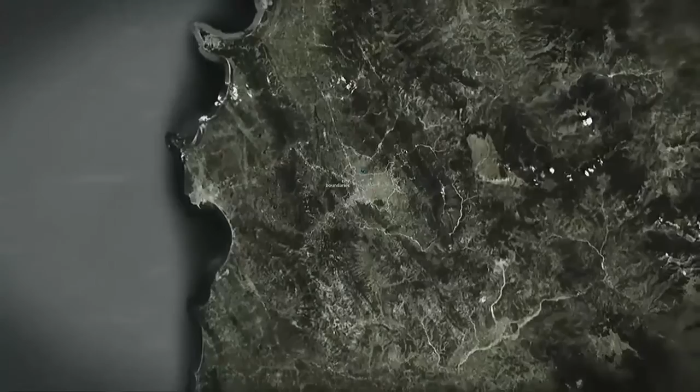So this is where Tirana is, somewhere down south, a little bit east of Italy, and it's a very incredible city. I guess I may spoil a little bit of what's going to come next.

So I'm not going to say too much about this, but it's kind of a flat piece of land surrounded by hills and mountains and ragged mountains.

And when we won this competition in 2012, the project was the key opportunity for the city to establish a new way of growing and re-establishing itself as a properly planned modern city.

And the 3 things that you see up there, the mosque, the hammam, and the bakery, which were the heart of a kind of Ottoman settlement that founded Tirana, are really no longer there.

The mosque is in part still there, but everything else has been wiped through the tumultuous history of Tirana, of communist and fascist rule and all this kind of stuff, which has left a very important mark.

But we were asking ourselves the question, so what are we going to do? We don't have a political agenda. We are designers. We want to deliver interesting places to live in a city.

And so we were given a site. At the time, the municipality was about 10 kilometers square worth of boundaries, and we were given a site of about 4 kilometers square to come up with a strategy.

And the most striking thing was that there was a straight line crossing the city, this boulevard that Stefano was mentioning, kind of started by the Italians, progressed by the communist regime, and then abandoned. And so we took that, and that was the core of the competition.

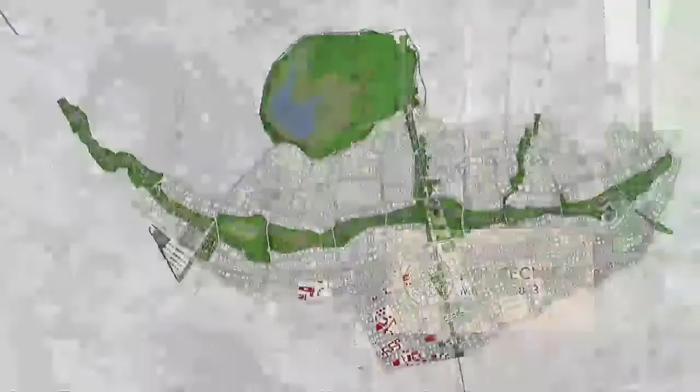So we had to do something with this boulevard, and we developed it in a very linear fashion, which was very different from every other entry.

And then we emphasized, a lot more than other people, this 8 kilometer stretch of river, which starts at the entrance of the city and ends at the exit of the city. Obviously the river is much longer, but in this transition, the river changes from a mountain river that comes down from gorges and stones, really wild, to a flatland river.

So we took that as an opportunity. And I guess the way we're going to talk about it today is that architects took this as an opportunity to define a future, right? So we established visions, and engineers actually have to deal with it on the ground.

And so our methodology was, what can an engineer learn from an architect with a big long-term future, and what we architects can learn from an engineer to establish an urban program.

And this is what's coming next. I'm not going to spoil it, but the idea that the city was restructured started when the project that I won, and now is changing again. So it will be another challenge for whoever is involved next.

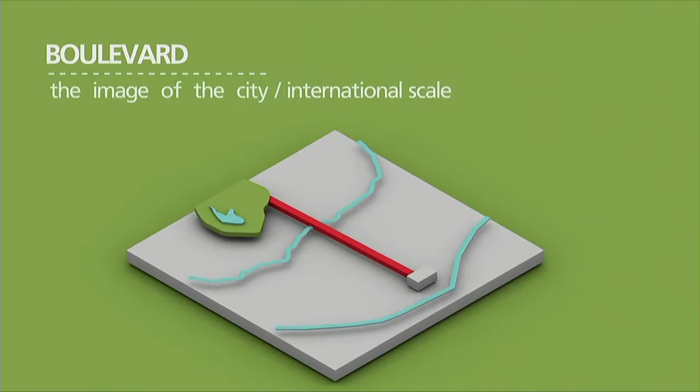We called our approach a constraint-driven approach, which is the synthesis of what I was saying. So we went to the ground, learned the things that we couldn't change in terms of physical things and also political things and social things, and we tried to bring this global idea of big architects who do stuff all around the world, and then sit in Tirana with the locals and understand what it meant for them. And the bits that met, we used to establish our project and our philosophy.

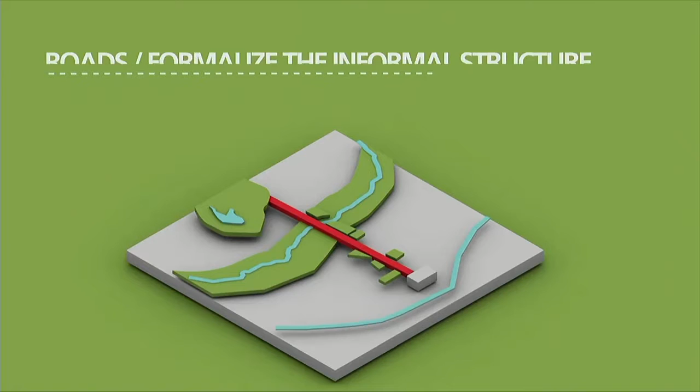There was a lack of, the boulevard was very important. We picked that, very straight, very formal, it's a symbol of a continuation of their history, of the history of the city. Urban space and green space was missing in the city, so we established that.

Pedestrian people in Tirana are out all the time. They walk around all the time. It's a very dense, very bubbly city, even in the not so quiet areas. There are very distinct areas, like happy bubbly, and some are dog-chasing-you bubbly, which is an interesting kind of contrast. And so Alberto, in Italian, will tell you what we learned from the river.

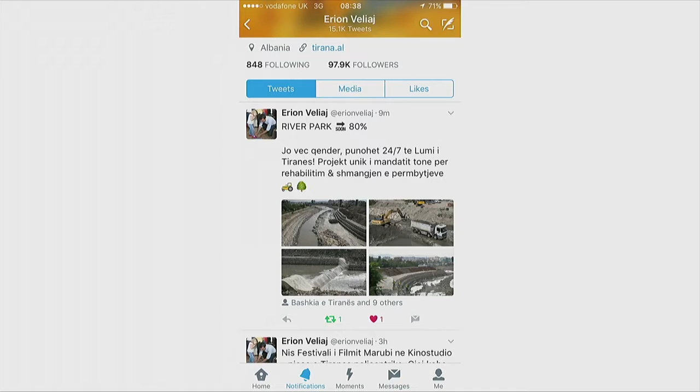But the interesting thing for us is to take our specific technical skills, you know, I make intensity numbers and foundation zones and flood zones, Alberto does that, but the way we try is to talk about them in the thinking of the city, of this part of the city. So what does it mean for people? What does it mean for the urban space? And we found that a very interesting approach.

And the very interesting thing that happens is that we started this job with the previous mayor. Politics in Albania are equally challenging as in most places in the world these days, but they're very ping-pong. So if you have a client on one side, then you can't work with the client on the other side when he comes up. And we were very lucky to have been on the ground, and I think the approach we used, very focused on being on the ground, allowed us to work very positively with the previous mayor as well as the new mayor who's now in charge of this, buying into our project and using it as a showcase of trying to change.

So change is coming. This project outlasts mayors by tenfold because this project is going to take 20 years to become what us architects, and that's what I'm going to show you next, want it to become, right?

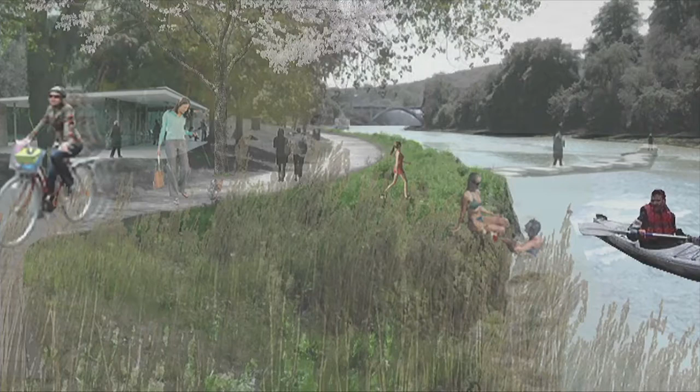A kind of a long cultural... these should all be green, by the way, just squint and think it's green. You know, we do very sketchy renders and we think, oh, it's a natural environment where the fringe of nature coming from the mountains comes into the city, and we will solve this problem of the fact that the banks of the river are built with rubbish.

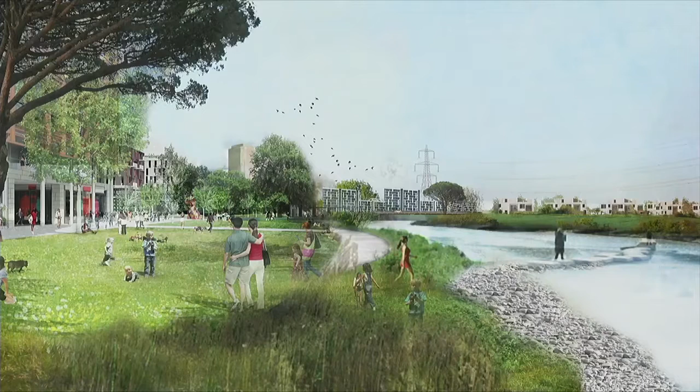We will solve the problem of the informal, read illegal, housing all along the banks of the river. We will solve the issue that there is no bridges, no road that gets to the river. We will solve all this, and eventually we'll end up with a beautiful piece of natural environment that people can kayak in and find pebbles to cross, and it will be a great asset for new development and all this kind of stuff, which is what urbanists and architects tend to do. You know, we just put a picture in the future and then work really hard to get there.

And so this is an extract. Of course, we work with landscape designers that are not here today, but I obviously must credit them. So Turkington Martin, very nice, pragmatic landscape people that deal with flood zones very well. And together we came up with this idea that, yes, the boulevard is the settling of the city, but the river has to be the idea of this new future way of understanding Tirana.

Also, this river is called Tirana. And if you go to Tirana even now and ask them why this city is called like this, they have no idea. They have no idea what the river is, actually, which is a bit strange.

And so we created a program understanding, so the borders of this are in essence the flood zones that we learned by all the data that came out of Alberto's job, and that defined a space where the city couldn't be built as a physical asset. So we leveraged that and turned it into building the city as a cultural green space.

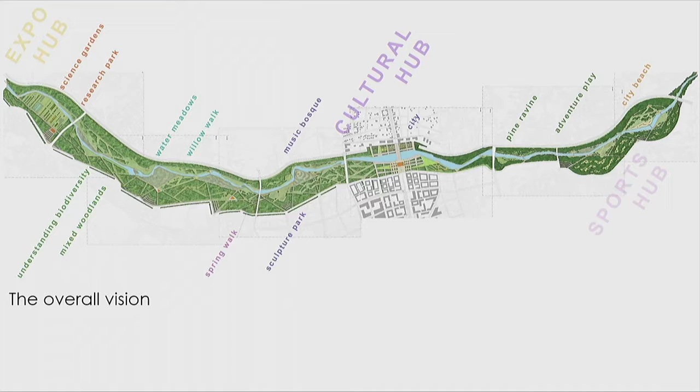And then we designed it in a way that it can be implemented in whichever order and in whichever opportunity, because obviously, if money is difficult in Italy, you can only imagine how difficult it is to get money in Albania, and this thing costs a lot of money.

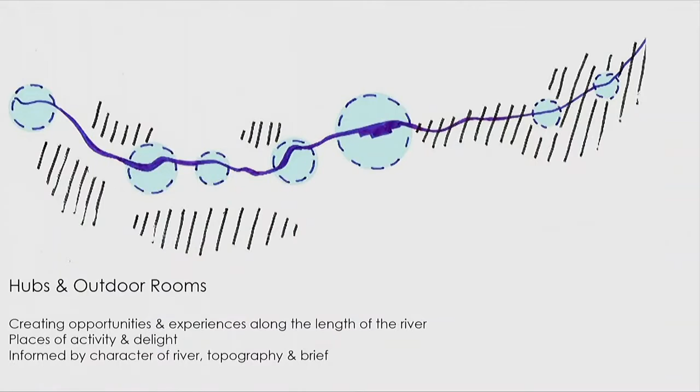So we created a canvas with a designed opportunity for things to happen in whichever way they will find the way to happen. And so we created this idea of hubs and outdoor rooms, which are the zones where the river tends to flood more, because that's where you can't put buildings for real. So there's this kind of double layer of everything. Certain types of trees that deal well with being in water a long time, and types of reeds that prevent the water flow, merge tactically with the engineering of the river management.

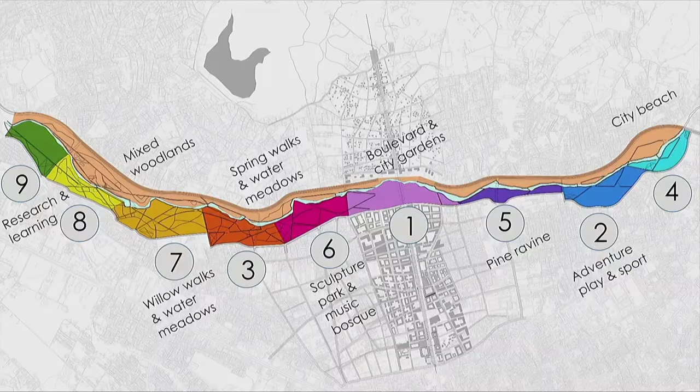And that's how we defined our landscape program and our cultural program within it. And landscape architects always do pretty drawings, so I'm going to show you some pretty drawings. And we worked on sections, and the sections were very important because Tirana is pretty flat, but past the river, there's a hill. So the first elevation of the city happens across the river.

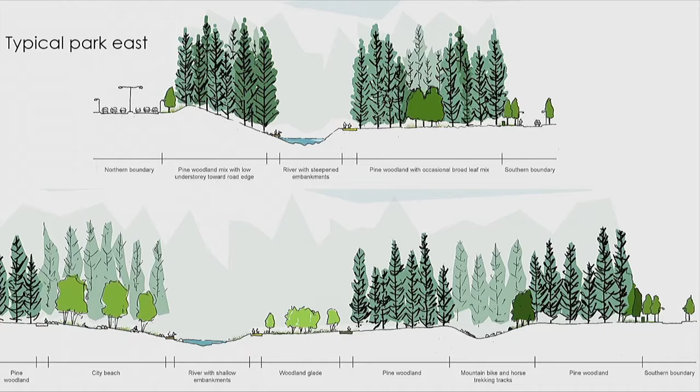So we were really keen to understand how we could integrate a big road and get people to access the river at different points, to ensure that this idea of parks and accessibility from the city, in a vertical connection, was possible, as well as walking along the river, which is obviously a lot easier.

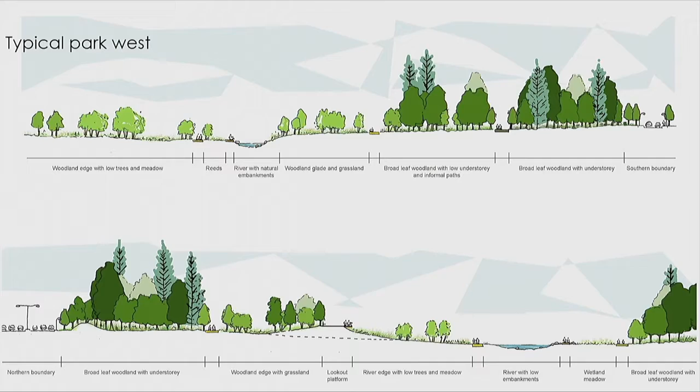And this kind of layering, and all these lines exist all along the river. They just move in relationship to each other. And the elevation—walking in the river is the place that floods. Walking by the river is the place that floods 1 in 100 years, so you can use it as a corridor for cycling and proper eco-commuting. And walking in the woodland is the place that never floods, so you can put cars in it.

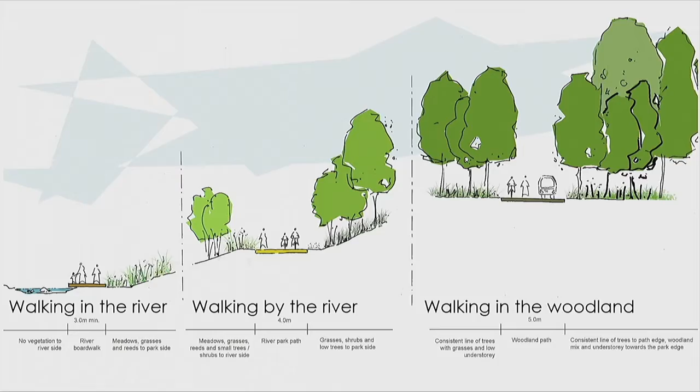And we kind of ended up with this—in summary, a high-density urbanity as a pivot, where the boulevard, the city, grows in density and height, and this really wild, or as wild as possible, nature, because in our view, that's what represents the ethos of Tirana—it's pretty wild, right? And it's very close to actual natural wilderness. So we wanted to bring that into the city and represent physically this challenge that we had to face.

So, and lastly, what we then learned from it, from our urban work, is that understanding patterns of events at ground level—literally on the ground and into the ground—is very important to understand the density dynamics that the city can live with.

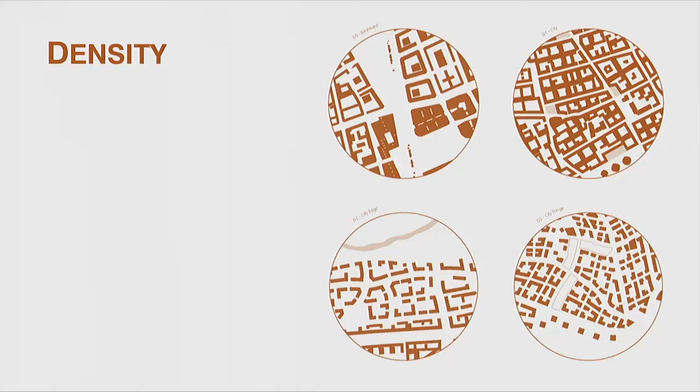So we extracted these ideas, 4 different densities, that became the ingredients of our plan for the larger portion of the city. And in an ideal world, they can be kind of experiments for replanning the whole city when it happens. Of course, this is now going to be turned into a new project that you'll hear about in a while.

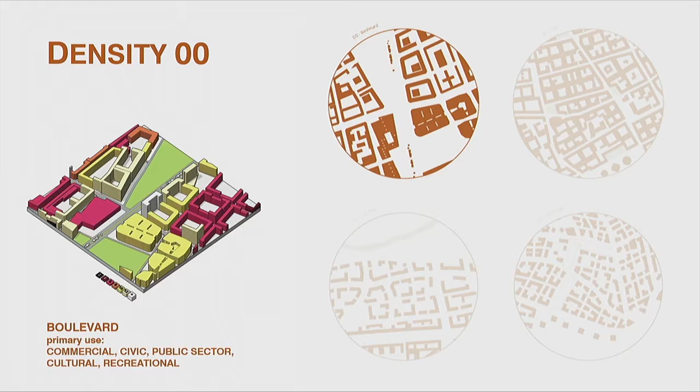But very shortly, we learned that the boulevard is kind of the city representing itself, you know? There's a place for public buildings, open spaces—the importance of this capital city of a small but historic state in the center of Europe, with all its contrast, but also interesting survival of 3 different religions and lots of different types of politics that govern it. It's kind of, it needs a place to be representative of itself, and that's where the boulevard is. So big buildings, tall things, big parks, that kind of idea.

But then, it could kind of look like that—a bit kind of global-looking, yeah? Apart from the pink color.

And then there's the eco-compact city, which is something that we're really interested in—the right balance of density. How close can we live together? And what is necessary for us to live close together? And this is something that Tirana is actually a very good example of, because they live really close together.

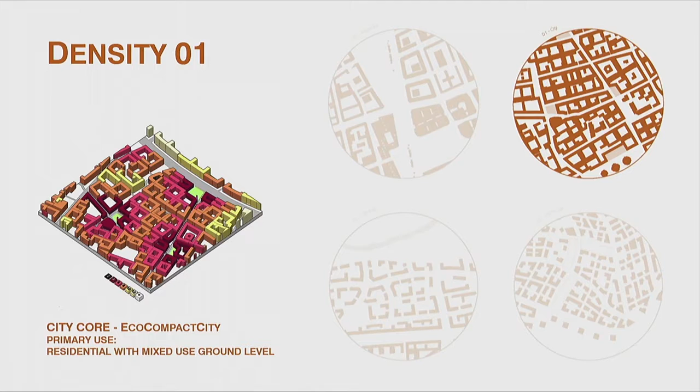And they managed to create interesting informal outdoor spaces in the courtyards that get opened up to the public, things like that that are not planned at all. So we really went around and walked around in places where probably we weren't really welcome, to try to understand how dense this place could be.

And so we think this is a good model, and we learned this and exported it actually in a lot of other projects we're doing around the world. And you know, it's better when you have windows on the building, but never mind.

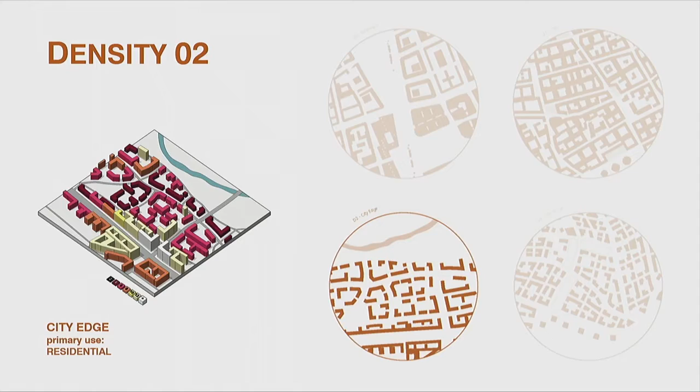Then there's the city edge, the fringes of the city that open up towards the natural boundaries, in this case the river, where it becomes a bit more suburban, but with density that, for me living in London, would still be denser than a normal London environment. The buildings are opened up, they have their own gardens, but they have a physical understanding of nature. So they see nature, they see the mountains, they see the river, they have walking access to these places, and they can be all around the city center.

And lastly, there's this kind of agricultural park. The idea is that the edges of Tirana that we are now building on were the agricultural reserve of the city in the last planned iteration. So we're building with a system that allows the land to still be farmed, which is very common there. People have lots of gardens where they grow vegetables, and this is still a very common practice. So we enhanced that and made it into public space.

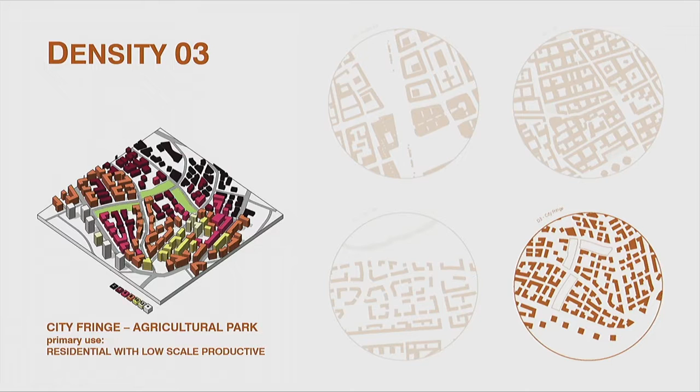Here the idea is that all the green strips are communal farmland - you preserve bits of farmland, don't build on it, and let people appropriate it, what you'd call allotments in the UK. Here it'll probably be a lot more fluid and a bit anarchic, but it gives space for these things to happen. You don't detach the idea of food production from the planning of the city.

That was the aspiration. It still provides some density because the city is growing at an enormous pace, and we didn't want the city to sprawl out. Because there are a couple of corridors with no boundaries, the real challenge for planning is that if you don't give enough density close to the center, people will just go and build little houses everywhere. We were really keen to understand that dynamic and give tools to the city politicians and planners to avoid that issue, which is an issue all around the world and very difficult to tackle. And we ended up with this.

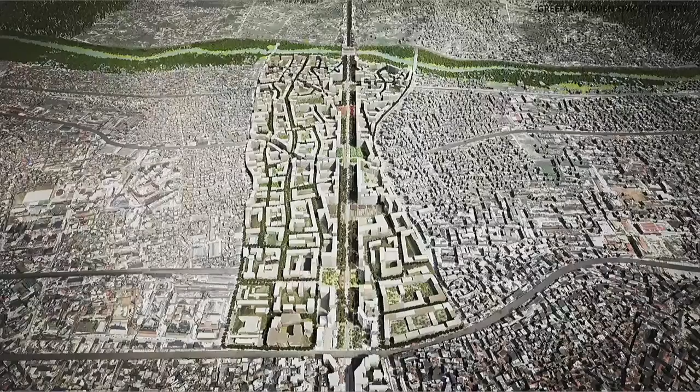So we then had to do a detailed plan only for a central part of it, just for the boulevard and eco-compact city version of the densities that you see. There's this idea that the boulevard is the continuation of the image of the city, built by big commercial and public buildings.

In this iteration, which has now evolved, there were a number of squares, and each square carried a density of a certain use. So there's a commercial square with all the shops, a judicial square because we had to design a new Palace of Justice, and so on.

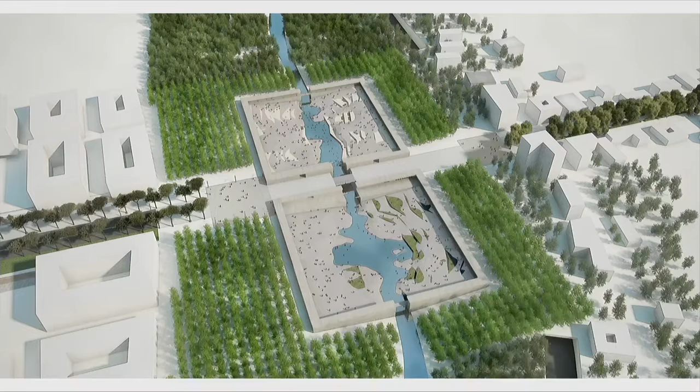And lastly, we had an attempt at designing a building which isn't really a building, that talks about architecture in a landscape - so it isn't really architecture or landscape, and is based on our collaboration and on data generated by engineers. We tried to design something the way we thought we were working, and we ended up with this.

This is at the crossing between the river - the regenerated, clean water, free-flowing, beautiful mountain river - and the axis of the boulevard. So there's a very formal building that becomes a public space where people are formally brought to their newfound river Tirana, which defines their city, and they can swim in it.

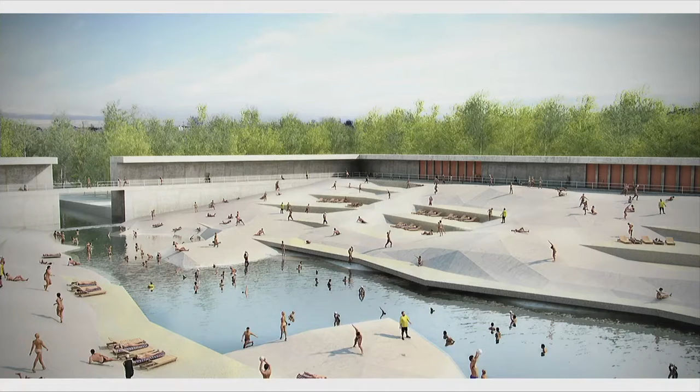One courtyard with a river flowing through is inspired by the mountains, so it's got little trees and grass, and you sit on a rock and have the mountain experience. Next door is inspired by the sea where the river goes, so instead of rocks you have sand beaches and different types of plants. But the binding thing is that it's a fun place to freely engage with this newfound river.

So we made a swimming pool out of fresh water - that's the idea. Now, I say we made a swimming pool, but this is still on our drawing and our aspirations, right? So one day we will make a swimming pool out of fresh water in the middle of Tirana or somewhere else. And that's all we wanted to say.